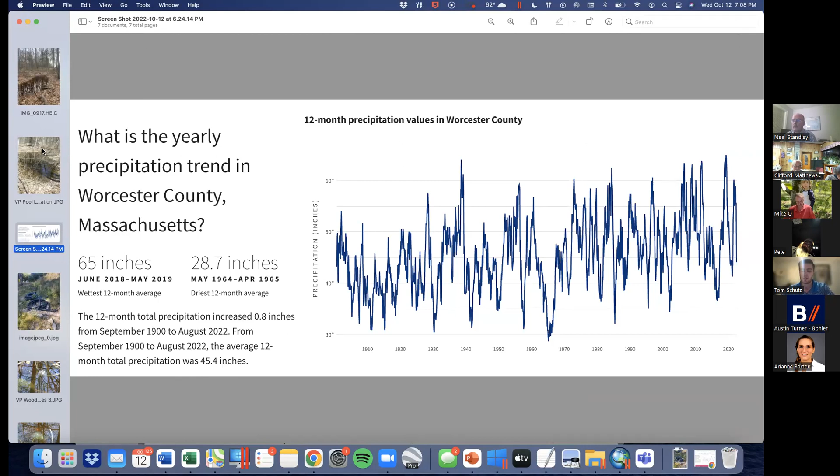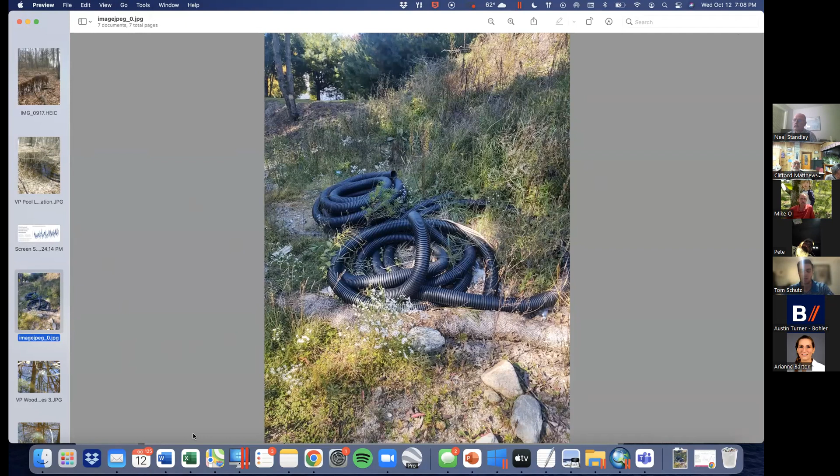We believe the increase of water led to the 20 egg masses, and this was an anomaly. We also had the increase of water due to a hose being put into that isolated depression. A trench was dug in the rear of the property, dumping stormwater from a house, before it was asked to be removed by the Conservation Commission in 2018. This was leading to more water being in this isolated vernal pool in the rear of the property.

Due to the large amount of water, with 2018 being the highest precipitation year on record, we believe these 20 egg masses were just a coincidence. What we saw in 2022, and what the BSC Group concluded in 2017 when the original negative determination came through, is that this is not an isolated depression. We still agree with that. We still agree this is not a vernal pool. We agree with BSC's conclusion on that.

Next, I'd like to show some of the other images that were sent to us. These were some of the images of the vernal pool egg masses sent to us. There's not really any context into where these egg masses were actually taken—these photos could have been taken anywhere, realistically. We definitely have egg masses shown in these, but there's no context on where these are being shown or where these egg masses could have been. I'd like to put that on record as well.

We'd like to come forward with a proposal, as well as certify the 2 rear vernal pools, so those will be protected in perpetuity forever. That certification process will be done next spring with Natural Heritage, a full certification process. In return, we would call this isolated depression in the rear of the property a non-jurisdictional feature—not an isolated wetland, nor a vernal pool—as in 2017, when the original negative determination came for the RDA. That's the finding this commission found.

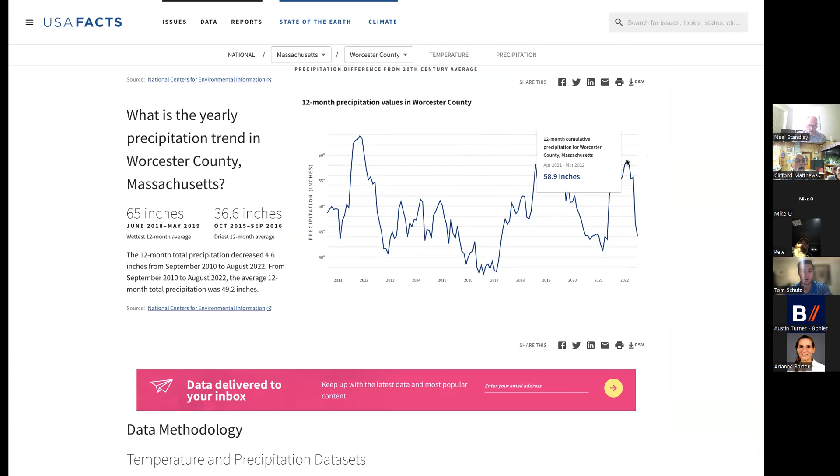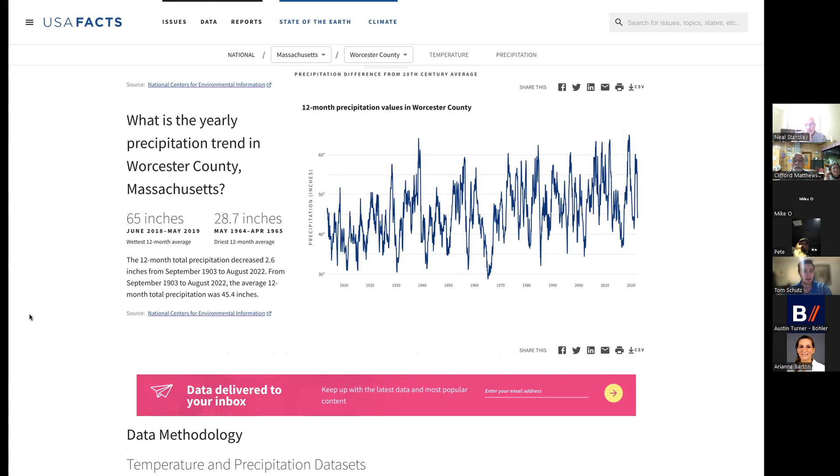If we change that up to 1900 or even 1903, the averages don't change, but we still have 2018 as the weird anomaly year while the rest of the averages stay about the same. We have these jumps—we never saw the amount of rain we saw in 2020 or 2018. Here's this data, with 2018 being the rainiest section.

Okay, can you go back to the previous screen?

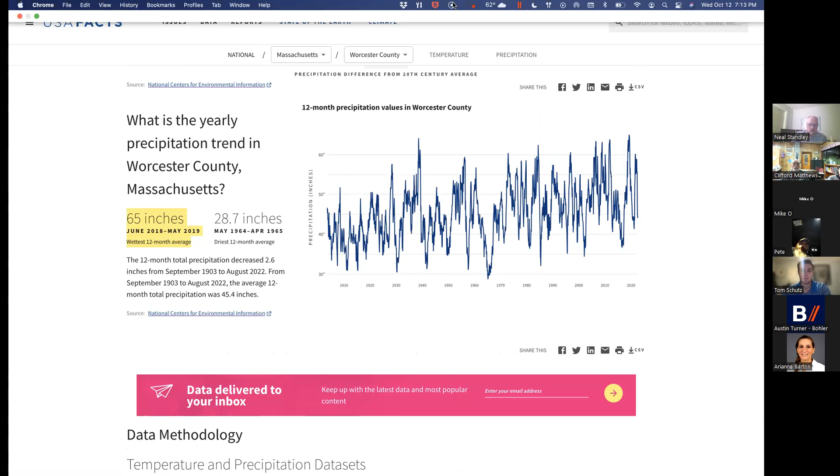So this is 2010 to 2022 data. Okay, so at what point does the new year begin? Here's 2018, this is 2017, here's 2018 right here. As we're building 21, at the end of 21 and the beginning of 22, it looks a little lower.

What's really interesting about this is that you're looking at Worcester County. Of course, we're in Norfolk County, and a drought was declared at the end of May based on 3 previous months of significantly reduced rainfall.

But we can infer that this is very similar data, as Worcester County and Norfolk County are directly next to each other. We could also see at the end of 2022 we're dropping there. We only have 44 inches of rain at that point, which is leading to the actual drought itself.

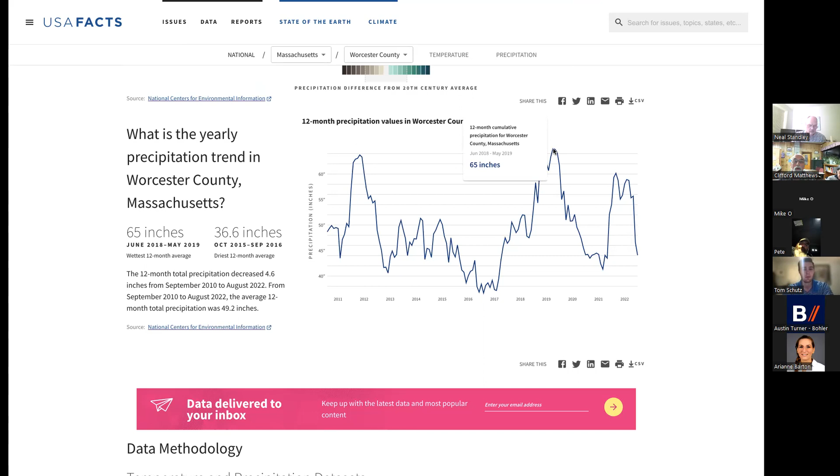But I don't think that changes the fact that in 2018 we have 65 inches of rain, which is 15 inches greater than the average of that time. Unfortunately, we have no data other than those 3 data points.

And we could see that 2018 was the anomaly year with the egg masses as well. In 2017 and 2022, we only found 0 and 2 egg masses, as opposed to the 20 egg masses found in 2018.

Irrespective, we believe that 2018 was an anomaly, just due to the large amount of water in the depression, and also the piping of water from the house leading into the pool, which led to a large amount of vernal pool species finding this habitat and using it. When we have a small amount of rainfall, the pool itself is much smaller and doesn't serve the same purpose as it did in 2018, the anomaly year.

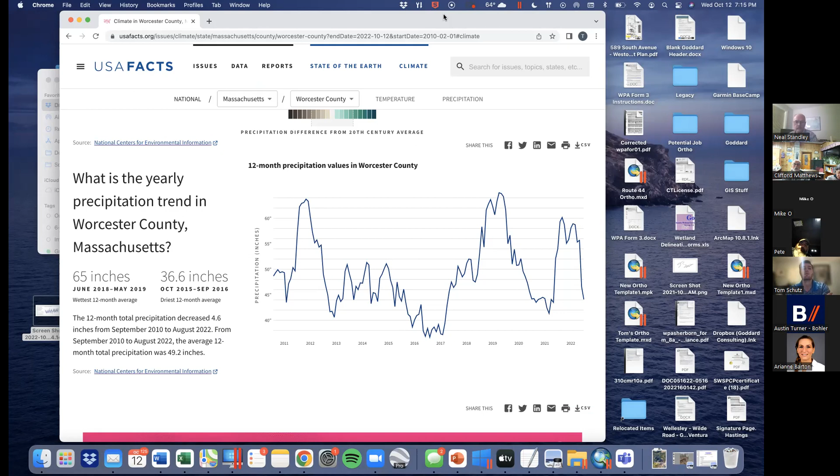We were out in the field in 2018. I was out there personally, with the town planner, and there was no evidence of that pipe. We were only out there at one time, that's when we discovered the egg masses. I have no idea where the pipe came from or what the purpose of the pipe was.

It's kind of hard to imagine that someone would run that pipe 100+ feet into that isolated depression. But we actually have something that came from the Conservation Commission, from April 11th of 2018, that asked for the removal of that pipe from that actual pool itself.

Let me just share this with you quickly. This was shared by Ann with us. This is the document we received from Ann Matthews, advising the applicant to remove that overflow pipe from the infiltration basin into the actual pool itself.

There were some other revisions, moving the overflow pipe. I think that was in the design, Tom. There was a design they had with the planning board that shows an overflow pipe being put down into that basin. We didn't even know that they went in there and did these test pits.

So in 2018, this was being used as a detention basin before that evidence came, and that's why the overflow pipe was in there, because it was being used as a detention basin, which is quoted as an infiltration basin here.

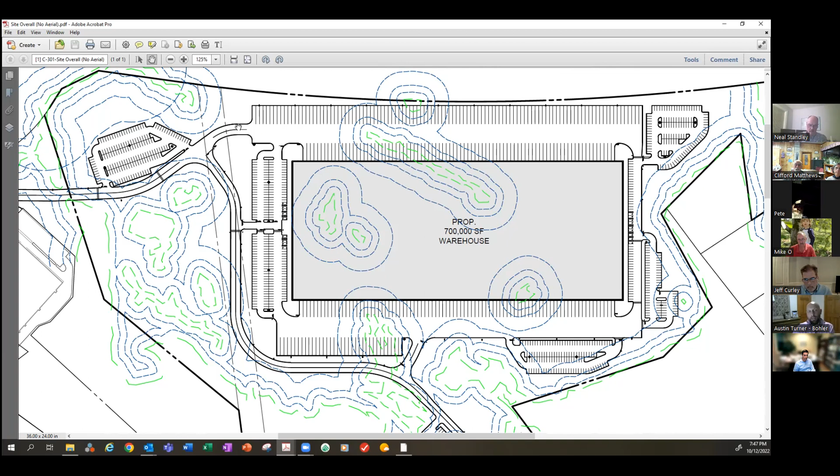It is frankly an exceedance of the Mass DEP standards, as well as those which the town has, some of which frankly on a local level are more strict and stringent than those which the state enforces. So we've incorporated both of those performance expectations into this design, as well as the items that we had talked about historically.

From a utility perspective, what we're doing is we are connecting to the infrastructure that is located in the Crossroads Shopping Center. There's going to be water line connections that build off and extend from that infrastructure. Our sewer is going to be conveyed up to the existing gravity system in Crossroads by way of a new force main. Electric, telecom are going to come through this new driveway, and we're going to make those infrastructure connections that way. We'll get to Andrea and Brian here momentarily. I know that's kind of the start of the show.

Generally speaking, what we're doing along the perimeter of this project, we've piggybacked and expanded on the mitigation that we had contemplated as part of the Shoppes project to frankly improve upon the existing resource areas that are going to be altered or displaced as part of the construction of this project, and then make them contiguous to the more viable and valuable wetland resource areas. So Andrea and Brian will be able to speak to that, and we'll get into a bit more of a granular discussion there.

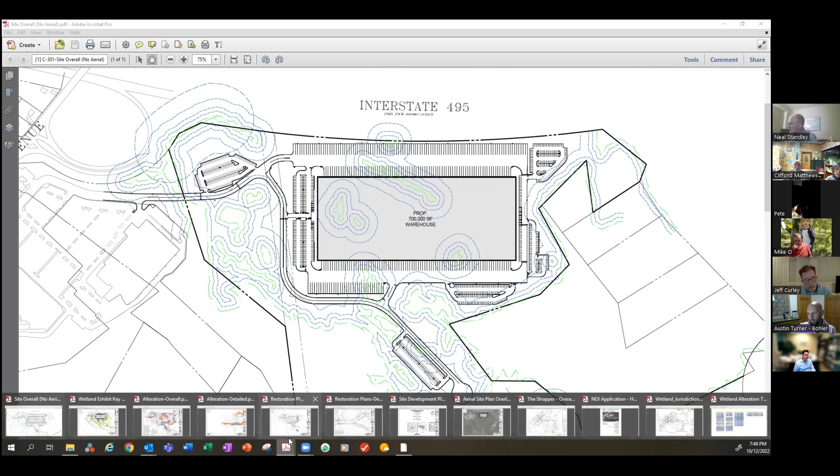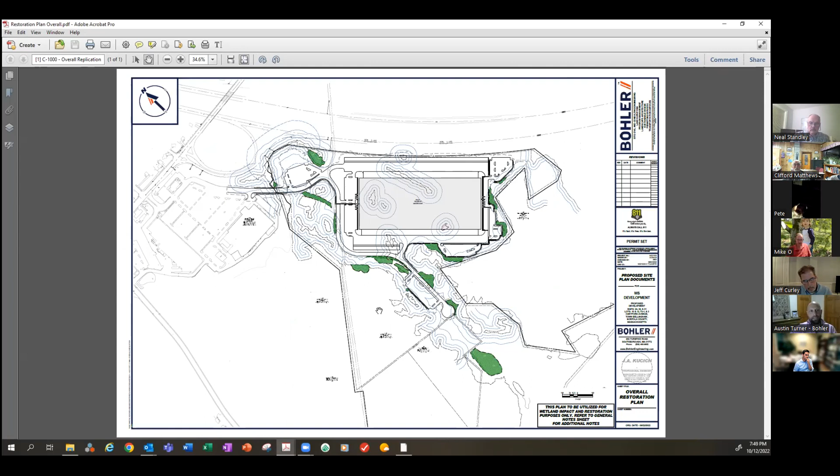The last piece before I pivot, what we've also done here, that's the Shoppes project right there. What we're doing as part of the mitigation, this will be a graphic we'll get to momentarily, but the area located in here, we have about 40 acres of new conservation land that we're proposing to deed in perpetuity and conserve in that regard. And these properties in here are existing conservation restrictions that we're intending to basically extend off and build from.

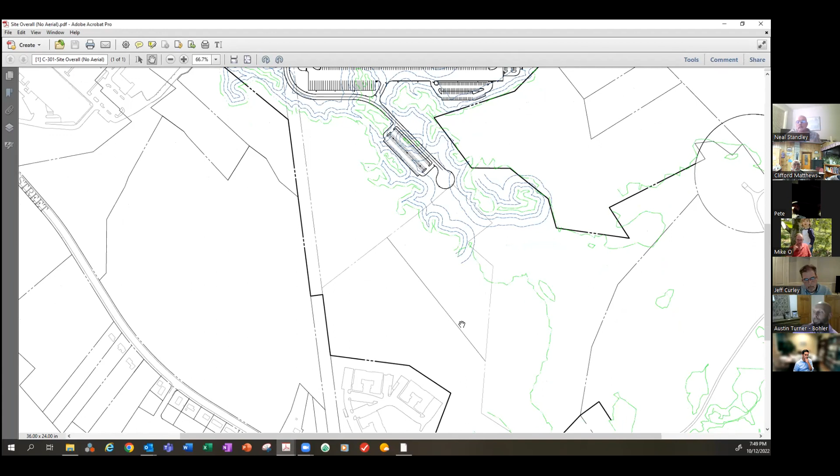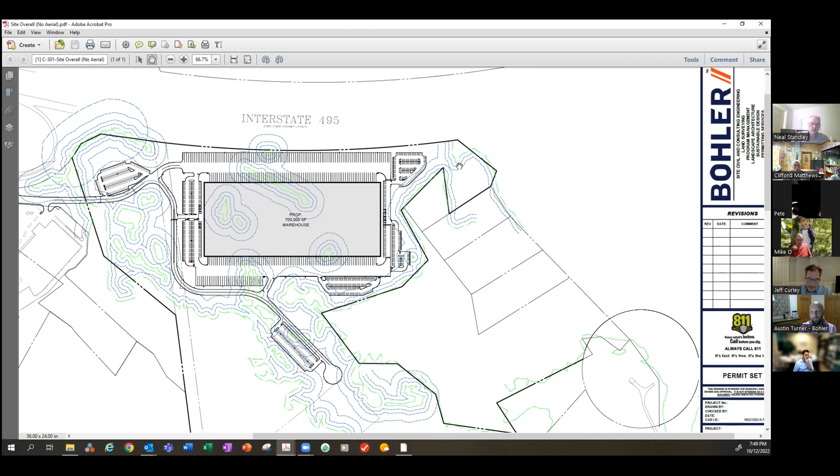So what we'll do in this general area here, this is Wetland M, this is the Atlantic White Cedar Swamp. The bulk of this is proposed to be in a new conservation restriction. And then as well, this area up in the corner is also proposed to be in a conservation restriction. Now, those areas are reflective of the agreements that we had made previously when we had gone through this conversation with the commission. And frankly, we've expanded upon those with the new compact footprint that we're proposing for this project. It's enabled us to expand those conservation restrictions that we're proposing here as part of our comprehensive mitigation package. So we think that's an improvement and upgrade, frankly, over the last project.

So what I'd like to do is pause here momentarily. If there's any questions about some of the engineering stuff, I was at a very high level. I didn't want to get too deep into the engineering weeds just yet, but I'm happy to. And I wanted to pause for a second in the event there are any questions about the things that are under my control before I hand it over to Andrea and Brian to start talking about some of the wetland related items.

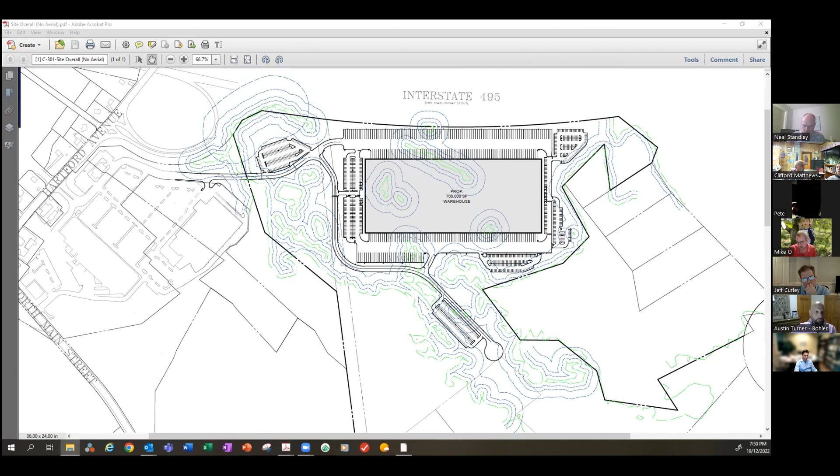So for the record, would you quantify the increase in the area that will be preserved by CR as opposed to the previous? Sure. I'm going to pop that exhibit up. I have it right here. Hang on one sec. So the conservation restriction. This is going to slide into your screen here. I'm assuming you can see that now, right? Yes. So this here is now 42 acres. We've added about 3 acres to it.

Could you back up for a minute, please, Austin? We lost you. The area comes from nudging this forward. Can everybody hear me okay? You're breaking up a little bit, Austin. I think we can understand you. Neal, can you hear Austin? He's in and out and now he's frozen. Now he's back again. You guys got me now? Yes, you're back. All right, good. Austin, just don't move the screen around. I think that's when it glitches a little bit.

Okay, got it. So what you can see, this red boundary is the proposed conservation easement that we have. The total area of it is just over 42 acres. What we were proposing originally was a little bit under 40, so we're nearly 3 acres more than what we were considering before. The bulk of that area comes from our ability to push this, I'm going to call it an east direction, but basically plan up. We've expanded this to capture more of wetland M and its buffers in there.

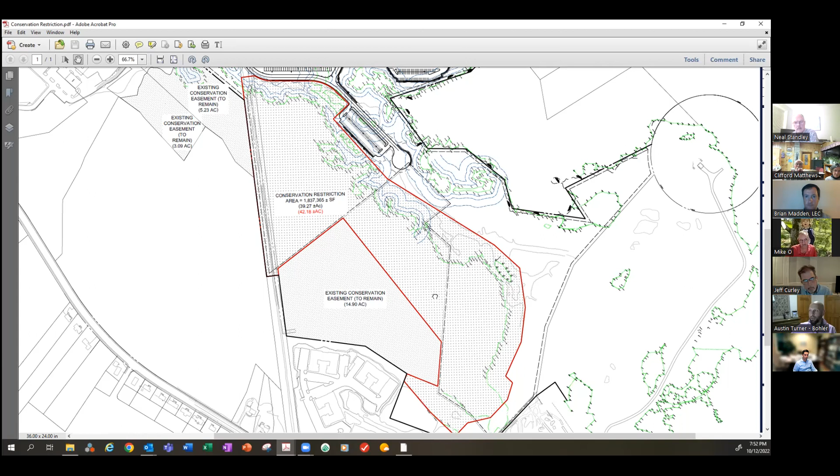And then we've also included this about 2.5 acres, which was previously considered as part of the Shoppes and was embedded as part of that order. So total, we're adding about 3 acres to the conservation easement, and it marries up against existing conservation easements too, to provide some continuity there. Okay. Would you like me to get into the Andrea and Brian part of the show? Sure. Oh, excuse me, Mr. Chairman, I have one question. Sorry. Go ahead.

Have you performed additional test pits in the areas proposed for the infiltration basins? That's a good question, Neal. So the old ones were done a very long time ago and probably in different locations. We haven't done new test pits, but we were careful to put the systems in the locations of the old ones and rely upon that data. I remember specifically having gone out there with this commission on Saturday and Sunday mornings with groundwater monitoring probes, and Anne's laughing because she remembers it was like January and February where we were out there freezing and dropping tape measures down pipes. So I remember those fondly.

And we haven't done new test pits, Neal. If that's something the commission wants us to do, we could do some confirmatory testing out there. We're pretty confident that based on the material here, which is frankly gorgeous sands, we're not going to experience a substantial change for the negative in groundwater. But if we need to do confirmatory testing, we're open to that. I didn't have any way to reference the existing to the prior. I figured they'd moved a little bit at least. They have, but we were trying to be very careful to put the systems over where we had done a lot of the testing before, so we didn't have to reinvent any of that. Okay, thank you. You're welcome.

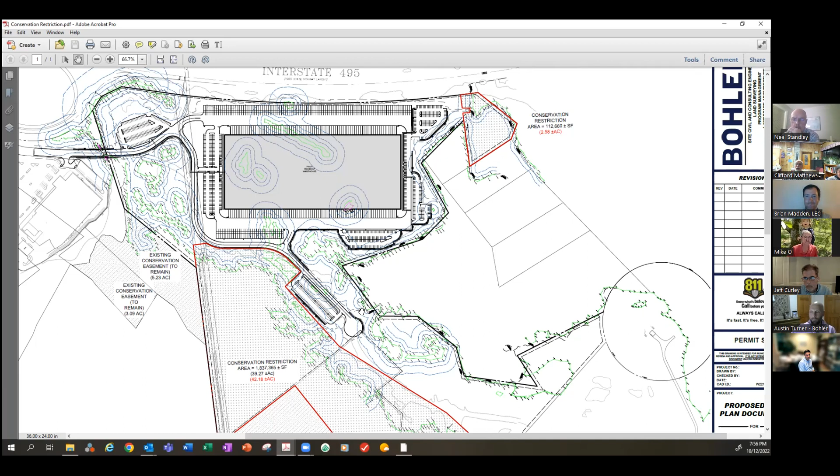So I guess it's time for Brian and Andrea. All right. So the plan I'm going to bring up is this plan that Brian and Andrea can speak to. This is clearly the project, and it's got a lot of labels on it. And we try to make it big so people can see it on the screen. I apologize in advance if it's more obnoxious than I am.

What we did is we color coded these. So the darker green colors are the isolated lands that are locally jurisdictional under your bylaw. The lighter green colors are the Massachusetts Wetland Protection Act wetlands. So, for example, this is wetland M, this is wetland A. I think this is Y, or, I'm sorry, I up here. It's kind of contiguous. The darker colors are those isolated systems kind of scattered throughout the project.

Excuse me, Austin, can you tell me the sheet number of that? I don't recall seeing that one. Is this a sheet in the submission, Austin? This is not a sheet number that was in the plan. I'll email this to you; we created it specifically for the meeting tonight. Okay, that would be very helpful to have a copy of that. Absolutely. Everything I'm showing you tonight, I can simply email you. Thank you.

You're welcome. Right. I'll take over to begin with. For the record, Brian Madden from LEC Environmental Consultants. So in addition to this plan, the NOI had provided a table of a breakdown of all the different wetland areas and their jurisdictional status, whether or not they're protectable under the state act and or the bylaw.

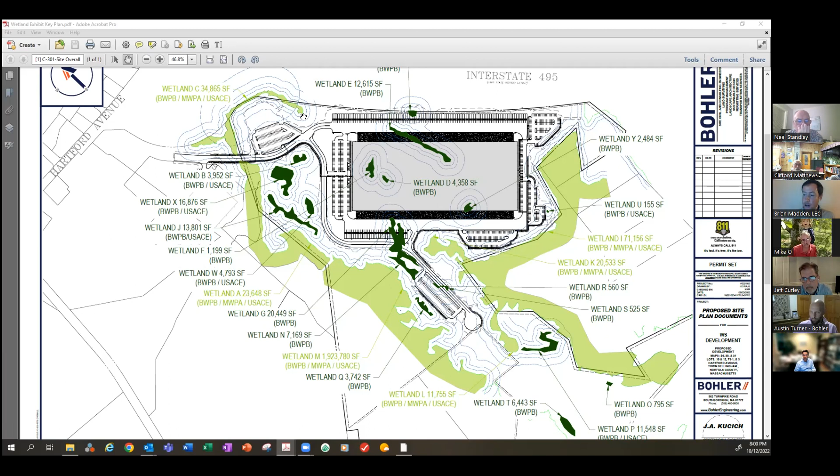And I believe based on the prior calculations and information that was submitted, going back to the ORAD, that's where it became perennial. And that's where the stream begins to channelize more in a very well-defined narrow corridor as it continues further to the south and ultimately extends under 495 to the east. So the crossing itself is proposed within an intermittent stream section of Spring Brook. Under existing conditions, there's a 42-inch culvert underneath the Woods Road. We are proposing to upgrade that to a 16-foot wide by 4-foot tall 3-sided box culvert.

Whereas under existing conditions, it doesn't comply with stream crossing standards. We are significantly improving that and designing something that does comply with stream crossing standards. And there's specific detail sheets on the crossing profile detail along with the narrative write-up of that.

But moving into the site, as Austin had alluded to, we had strategically designed the roadway to avoid a cluster of 3 isolated vegetated wetlands that are protected under the local bylaw. Those are X, W, and B. The prior proposal essentially eliminated those 3 areas, 2 of which we did determine based on the vernal pool assessments that they do function as vernal pools, wetland B and wetland W itself. And this past spring, I did document some vernal pool breeding activity within wetland X, a small portion of that.

There was some spotted salamander breeding activity, but there were only 2 egg masses, and ultimately it did dry up, and it's not certifiable, but it may be able to provide some vernal pool habitat functions in some years. So we strategically avoided that cluster, and then coming into the site, we've attempted to minimize and avoid impacts to the greatest extent feasible. The majority of the wetlands within the project footprint are previously degraded wetland systems that were created within the former sand and gravel operation.

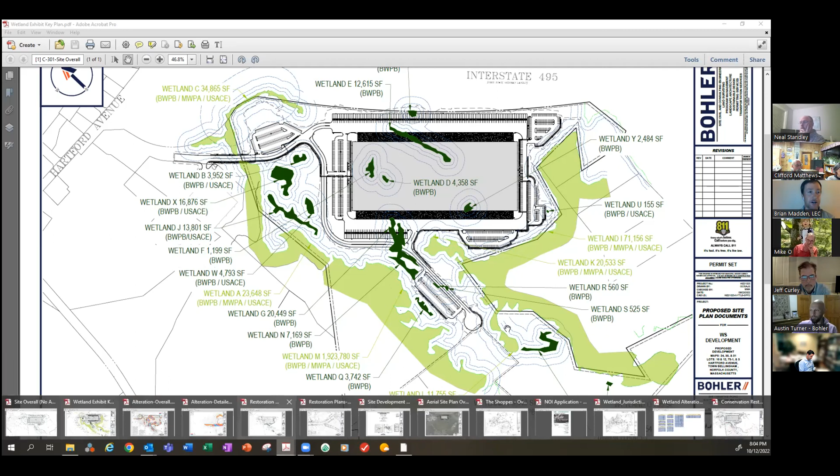And so what we tried to balance here is focusing our wetland replication areas where overlapping within previously considered areas and/or previously existing altered areas. We've attempted to minimize further intrusion into forested upland areas, and we are requesting relief on the 2-to-1 mitigation ratio and providing the 1.6 to 1. But what we are proposing to create is a significant amount of those wetland replication areas to function as high quality vernal pool habitat.

And based on my extensive analysis and observations of the vernal pool habitat conditions, we're confident that we can create some high quality vernal pool habitat out there. And obviously that's going to come with a lot of careful oversight during creation, but also adequate monitoring to ensure that they successfully establish and function appropriately. In addition, we are proposing to provide the open space through the conservation restriction, approximately 45 acres cumulatively.

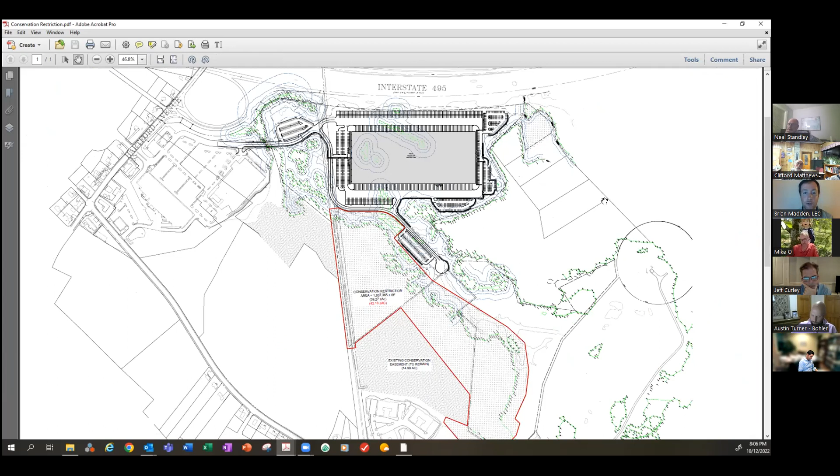And as Austin had indicated and shown on that prior map, largely overlapping with the Atlantic white cedar swamp and buffer zones associated with that. That also includes a number of vernal pool habitat areas as well. And we believe that the project, as proposed through the mitigation, will provide a long-term net benefit over existing conditions and sustainable wetland systems that are better protected in comparison to existing conditions. And I'd be happy to answer any questions, or others can jump in. Andrea, I don't know if you had anything further to add on that front.

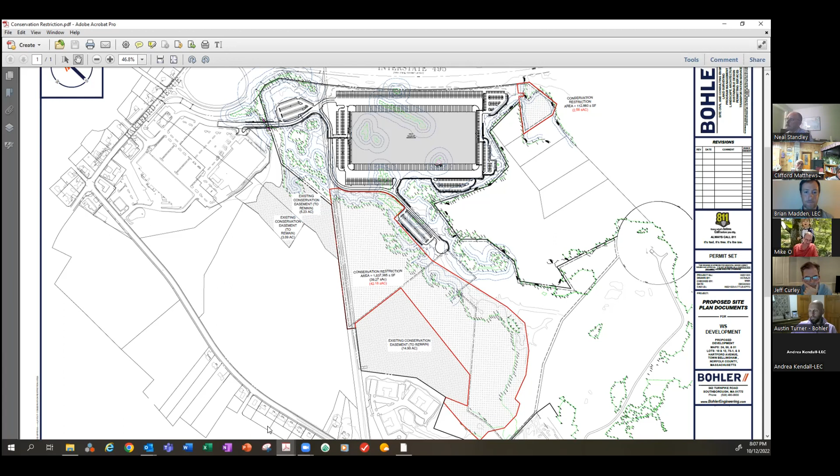With LEC, I'd also just like to add that we are providing buffer zone restoration by way of plantings and then seed mixes. So we're restoring, in particular, the trail between the two isolated wetlands on Plan West, and then all along the project development area. And that was it. Thanks.

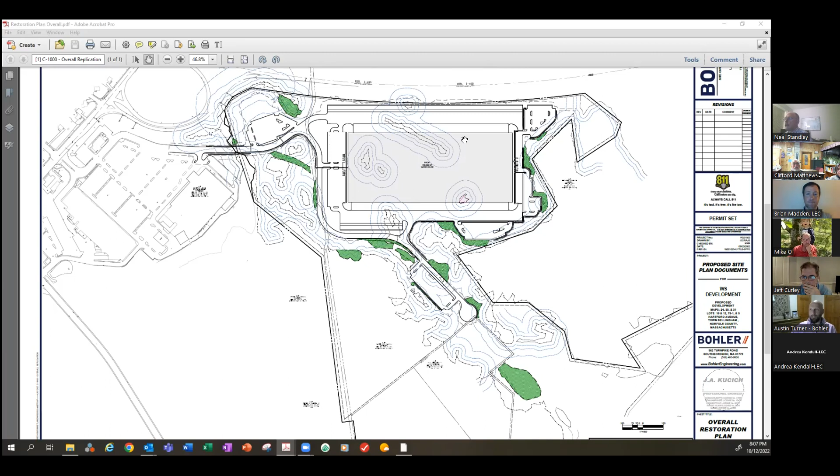So the green areas on this view, those are the replication areas? Yeah, correct, Neal. So there's a combination of things here, and I can zoom in a little bit. For example, this area up here, the northeast, this kind of crosshatched area, that's a wetland replication area. The kind of triangular pattern is where we're doing some buffer enhancement as well.

So some of these things will be contiguous to each other. And this is a very zoomed out plan, what we've provided. If you'd like, I can get into the very detailed plans that are included as part of the plan set that show what these areas are and what specific treatments are being given. So it's a combination of buffer restoration as well as wetland replication. Thank you. You're welcome.

I anticipate once we get out and start evaluating the site, and as Austin agreed, the closest points of impacts will be staked in the field. Then what we can do is we always come back to the hearing and for the record state the findings or conditions that we saw in the field. We don't make any decisions out there, but that would be an appropriate time to review case by case the areas that are proposed for mitigation. We'll see them in the field, take a look at them, and then we can evaluate.

We're going to ask you guys to carry the load with paper, and then we'll evaluate and see if there might be areas that might be better for instance for buffer zone enhancement, or expanded, or reduced in other areas. So the plans are great, the narrative is good, but nothing is better than field work.

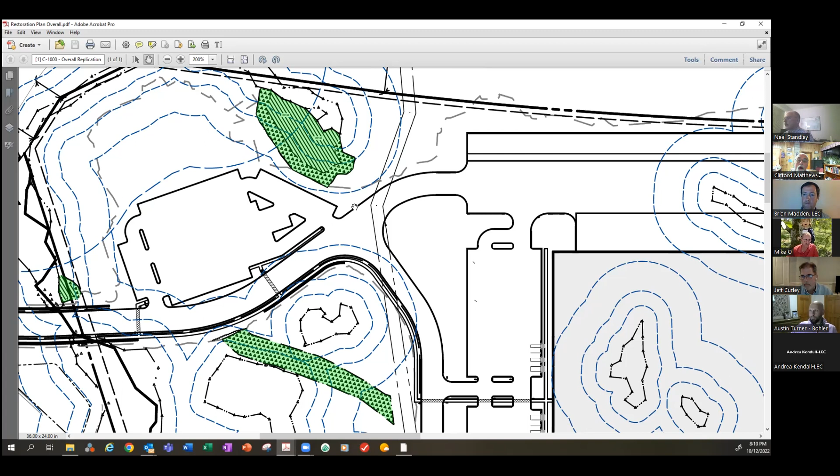Okay. Thank you. Yeah, Austin, if I may, I think that's a great idea, and maybe we're numbering points on that plan so that we could flag and number the flags in the field for easy reference for folks. Absolutely. I think that makes a lot of sense to get a plan nailed down and get a comprehensive list so we can be efficient about the time in the field. Yep. And the easier it is for us to identify and see what we need to see when we're out there quickly and accurately, it will help all of us.

I'm glad you agree, because I said it selfishly, the numbering idea was for me entirely. Now that helps us, yeah, less time we spend wondering where we are.

I'll tell you, I looked at some of the photographs that were submitted with the application, and I'm shocked at the vegetative change over the last time we were out there, probably 14. It's unbelievable. It's a forest. So procedurally, well, let me do this before we talk about procedurally. Are there any questions from the commission relative to the initial presentation?

Mr. Chair, I have one. Sure. So in the past, we've talked about wetlands replication, and I believe in maybe the Campanelli project on High Street, we talked about the ability to replicate successfully a vernal pool habitat, or maybe it was another project around town. I do remember it coming up as a discussion point with the developer and their wetland scientists. Have we ever received, to your knowledge, Mr. Chair, documentation indicating successful vernal pool replications, examples of them, pictures, affidavits, and so forth, confirming these have been done?

Because it might have even been just the project that was the Trimark warehouse that we talked about it, but I don't think we ever got assurances or scientific evidence that that was an established scientific environmental replication process. Okay, Mike, not in this town. I'm not getting ahead of myself, but we're going to be working to establish a scope for a project review with BSC, and the environmental person that we'll be working with there is Matt Burne, who wrote the Vernal Pools of New England.

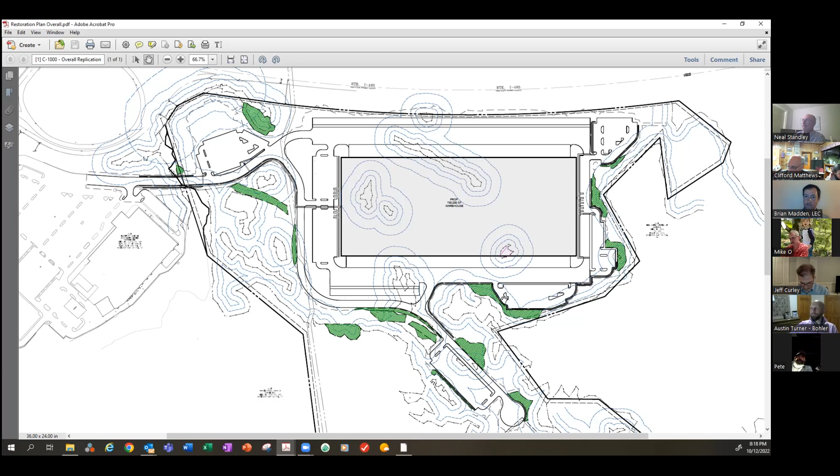All right, so looking ahead, we're looking at the possibility of continuing in about a month. Hopefully we'll have an opportunity to get our peer reviewer on board. Once we get that squared away, we'll ask Jeff to submit information to them, and they can commence their review. In the meantime, we're going to be approaching a pretty busy time of year. What is availability for the commission for potential site walks? I'd like to get something on the books before we continue, so that we can get the review moving.

So we have the 15th. That's this Saturday, but we're not going to piggyback on top of what we're doing that day, because that will be a lengthy inspection. So before the meeting of November 9th, that would leave the 22nd, the 29th, or the 5th. We can't do the 29th. Unfortunately, if this were summer, we'd have an opportunity to get out there after work and put in 2 or 3 hours, but it gets dark early.

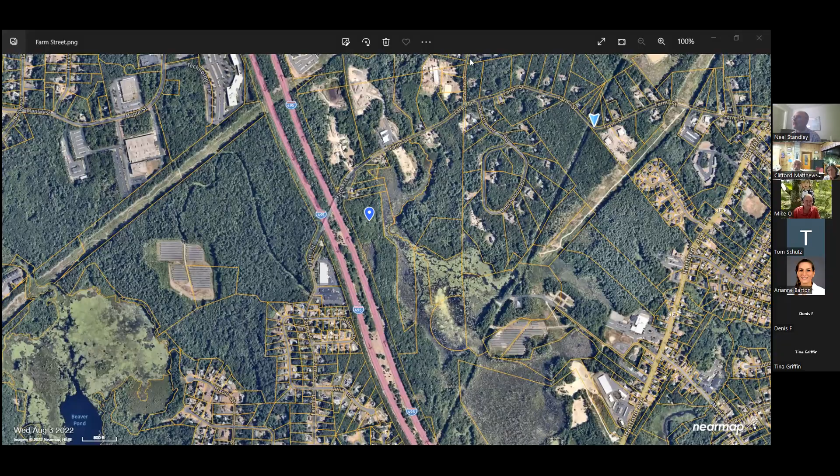I will accept the motion pursuant to the provisions of General Law, Chapter 40, Section 8C, to accept as a gift from Gary and Karen Martin a parcel of land located on Farm Street, shown as Lot 107 on Land Court Plan Number 13665X, filed with Certificate of Title Number 116650, Book 584, for conservation and passive recreation purposes.

So moved. Michael. Second. Neal. Discussion? All in favor? Aye. Aye. Neal's muted. I didn't hear his aye. Aye. Thank you. Okay. This is awesome.

When we meet on our site inspection with Lou Petrosi on Saturday, we will bring the deed for signature. Then what I will do is on Monday during the day, I'll have my signature notarized and will be before the selectmen on Monday evening. And then we'll have town counsel record the deed, and it will be the fastest land acquisition the commission has ever done. Right. So thank you very much. I think that we'll have other things that have to be signed on Saturday. But we'll surprise you with those when we get to the field.